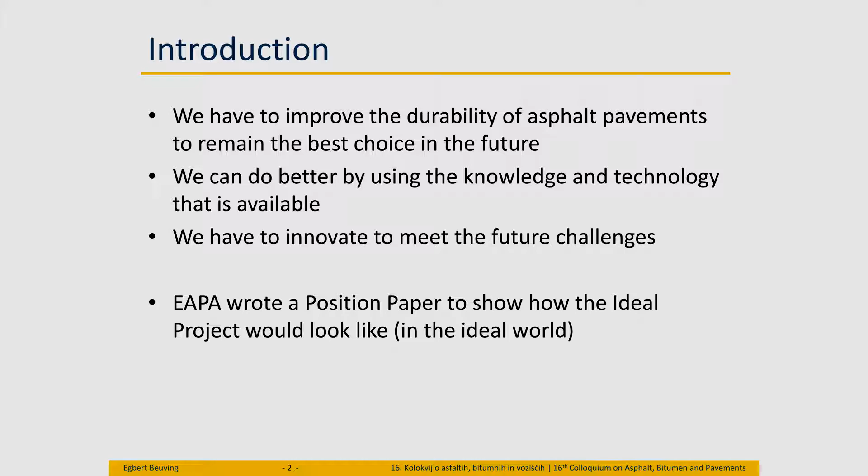In our asphalt industry, I think we have to improve the durability of our asphalt pavements to remain the best choice in the future. We can do better than we are doing now by using the knowledge and the technologies that are available. So in fact, we can do a better job than we are doing now. And we also have to innovate to meet the future challenges.

Ronald Blab already gave an example of using new technology, and you can see that when you use polymers, you increase the initial price, but in the end you have a good investment, a return on your investment. So it's a very useful tool to use.

To show you all the possibilities we have to create a better pavement, we created a paper called the Ideal Project, which shows the situation how it would be in an ideal situation. What I'm going to tell you is quite normal, not very special, but the technology that is available every day for you.

The goal of the paper is to improve the durability of the asphalt pavement. We have to improve the durability because it's important, first of all, to have a better availability of the road network.

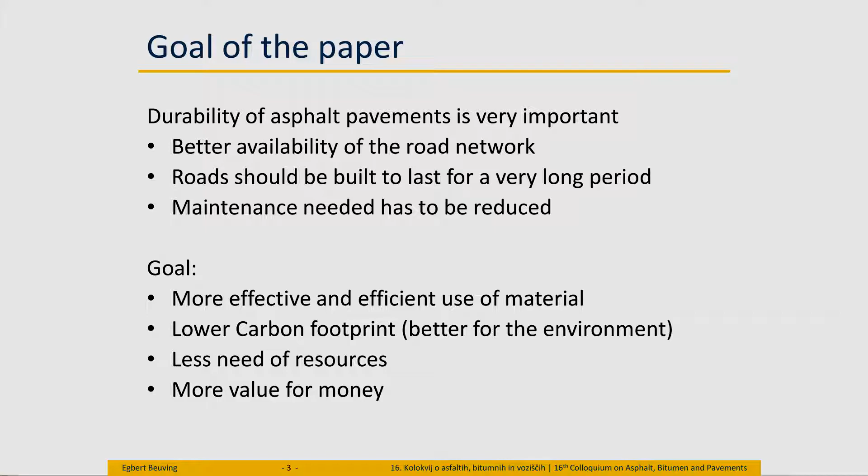We build roads to last for a long period, and we have to build them in such a way that the maintenance needed is as low as possible. Everybody agrees with that, I guess.

Next to that, by using materials in an effective and efficient way, we get a lower carbon footprint, which is very important to meet future environmental requirements. When you use your material efficiently, you also need fewer resources.

And last but not least, when you build roads in a very durable way, the road authority gets more value for the money it spends.

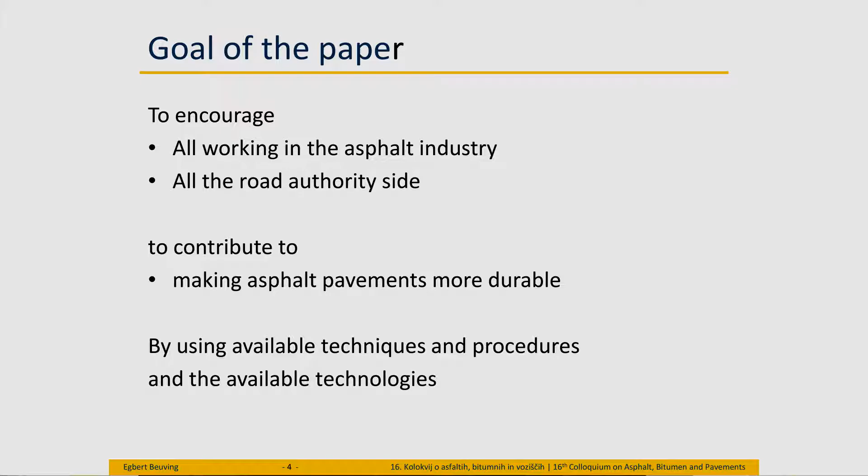The goal of the paper is to encourage everyone working in the asphalt industry and at the road authority side to contribute to making asphalt pavements more durable. So it's not only a message for the asphalt industry itself, but especially a message for the road authority to do things in a better way.

The main reason is also to be able to use the techniques and procedures that are available to make our roads better.

When you look at the paper, which is available on the EAPA website, you will find tools to increase the durability of asphalt pavements. We do that by providing good examples in all stages of the project, from the beginning until the end, or from the preparation stage until the maintenance stage.

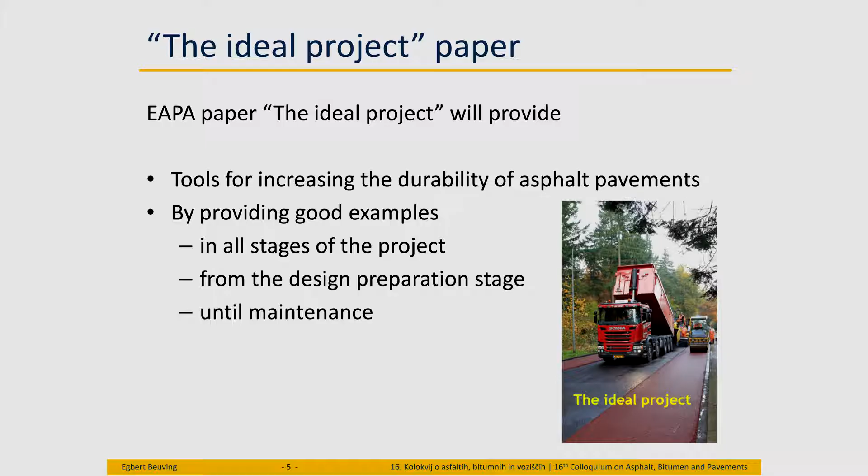So when you start, you can start, for instance, with the tendering procedure. At this moment, in most cases, the lowest bid is taken by the road authority, which means it results in the lowest possible or allowable quality. So you get as little as possible.

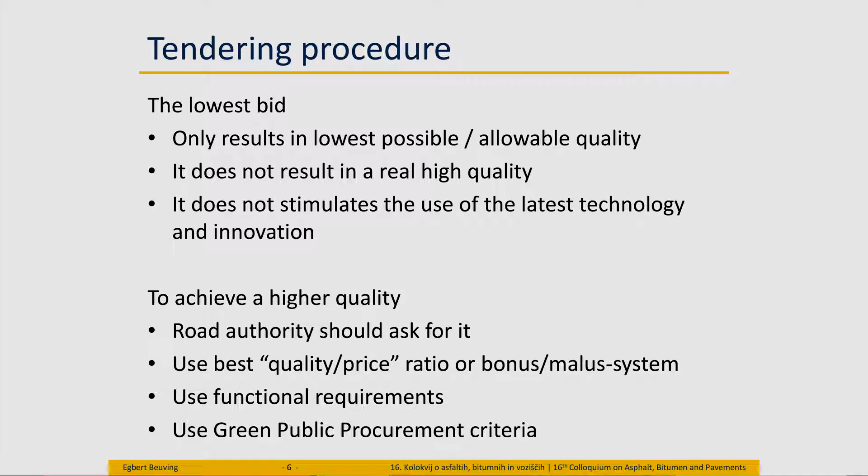And it surely does not result in high quality, and it doesn't stimulate the use of the latest technology or innovation. When you do it as simple as possible, you can have the lowest price. I always say that if Slovenko and I bid for a project, and Slovenko is even cheaper than I am, then he should have cut more corners than I did, because I already cut a lot of corners.

And that means everybody knows that when you have a very low price for a tender, you have a lot of problems on the job, and no need to talk about the quality in the end.

So to achieve better quality, the road authorities should ask for better quality, and they have a lot of possibilities to ask for more. They could use, for instance, the price-quality ratio, or give a bonus in situations when they get very good quality.

Another possibility is to use functional requirements. My colleague from the Netherlands will talk about that at a later stage - he says you should give the contractor an incentive to do his best. And there's also the possibility to use green public procurement criteria to get the product you're looking for.

Another example is project planning. When you put out tenders, you should do that in an early stage, because then the contractors have the possibility to prepare themselves. You should also see to it that you can do the paving operations in reasonable or good weather conditions. Everybody knows that in many countries, at the end of the year, they have to spend the money, and then you are paving surface layers at Christmas. Everybody knows that's stupid.

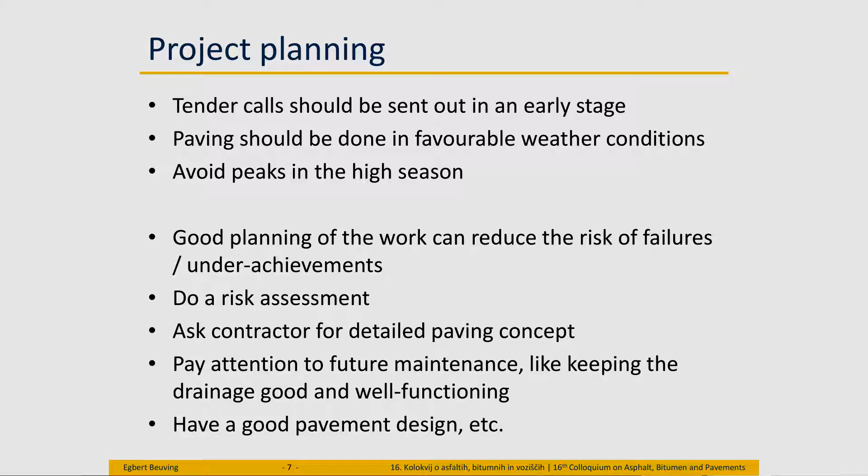Another thing is try to avoid the peaks in high season. It's good for quality to have an even distribution of the works, and by good planning you can do that. At the contractor side, certain things could also be done. As an example, a contractor can do a risk assessment to see where he should really be paying attention to the details. There are many other things you could look at in the planning.

The next example is the asphalt production. When you produce asphalt, it's important to see to it that you have a homogeneous product. I'm coming back to that several times. The main goal is to have a homogeneous product, because when you have a homogeneous product, you can extend the pavement life.

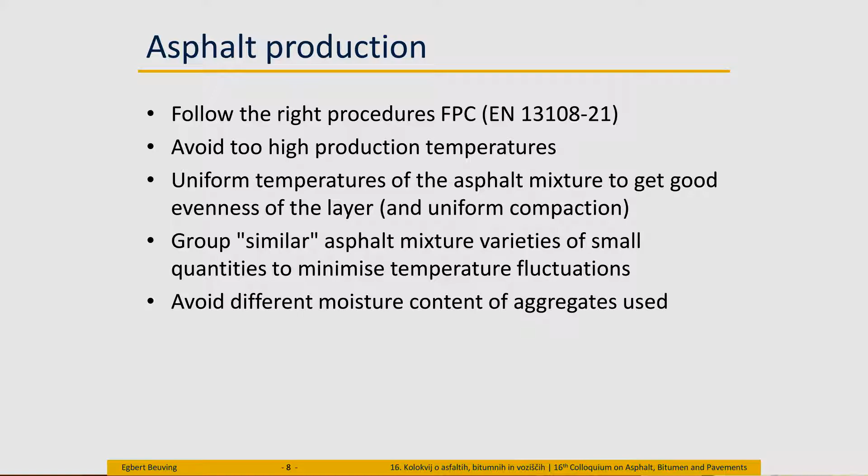So to get uniformity, you should try, if possible, to produce asphalt mixes with the same temperature and the same time period. You can group similar mixes to make the fluctuations less. Another example is try to avoid different moisture contents in your aggregate, because when you have a constant moisture content, there's also no need to have fluctuations in the burner to dry the aggregate.

The next step is the asphalt transport. For asphalt transport, you should avoid several things. You should avoid temperature differences due to cooling, and you should avoid segregation, for instance during loading. To be sure that you have a uniform mixture in the paver, you can use a material transfer vehicle or a shuttle buggy. You have to take care when you unload your truck, and all those things will help you to get a good quality in the end.

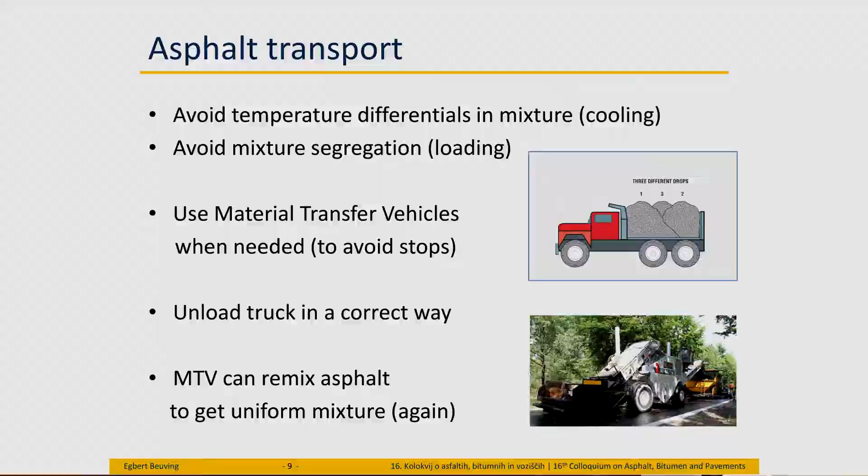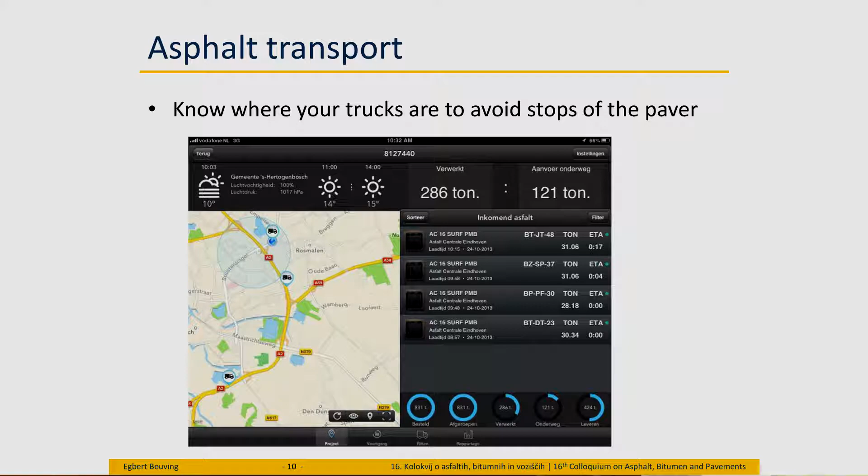We also have a lot of technology available to see where your trucks are. On the screen you see an example of KWS in the Netherlands. They use this software because they say asphalt is our black gold, it's very costly, so we have to know where each truck is. With this software you can see where each truck is, what it's loading or transporting, you see the license plate, and the estimated time of arrival.

At every moment you know where your trucks are. That means that when you are paving and you see that the amount of asphalt is reducing in the hopper, you can watch on your iPad or mobile phone and see when the next truck will be there.

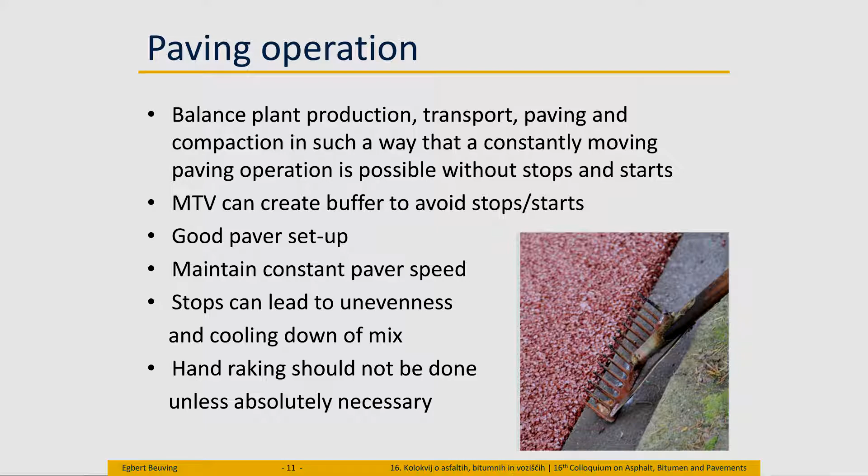During the paving operation itself, it's important that you balance the production, the transport, the paving and the compaction in such a way that you have a constantly moving paving operation. The constant speed is very important for several reasons. First of all, it's important again for having a homogeneous pavement. When you have a constant speed, you have a homogeneous surface, a smooth surface, and you can compact it in a good way.

As I said before, if you need it, you can use a material transfer vehicle to see to it that you have a constant amount of asphalt as a buffer.

Last but not least, when you are outside, you often see that the people using the rake do stupid things. Maybe you didn't pay attention to it, but I would say have a look at what they do, and in general you could say the less they do, the better it is, because they often disturb the good surface.

You also have the possibility to scan the temperature behind the screed by using an infrared scanner. And you also have a weather station that can inform the roller driver about the cooling speed of the asphalt layer.

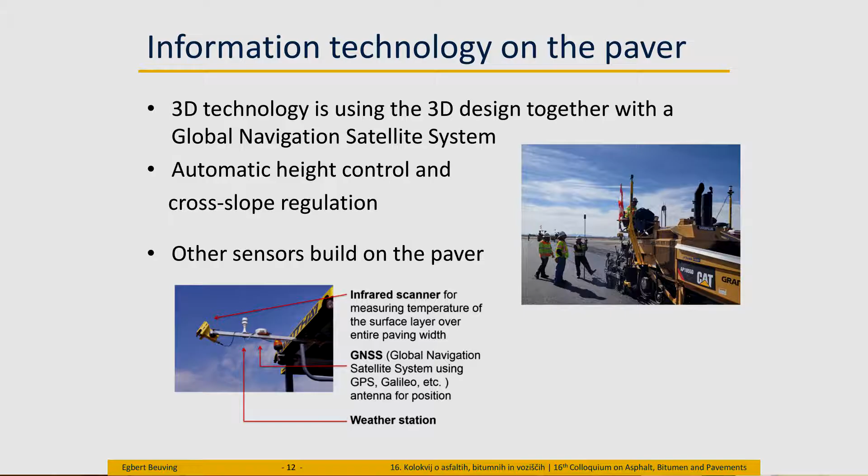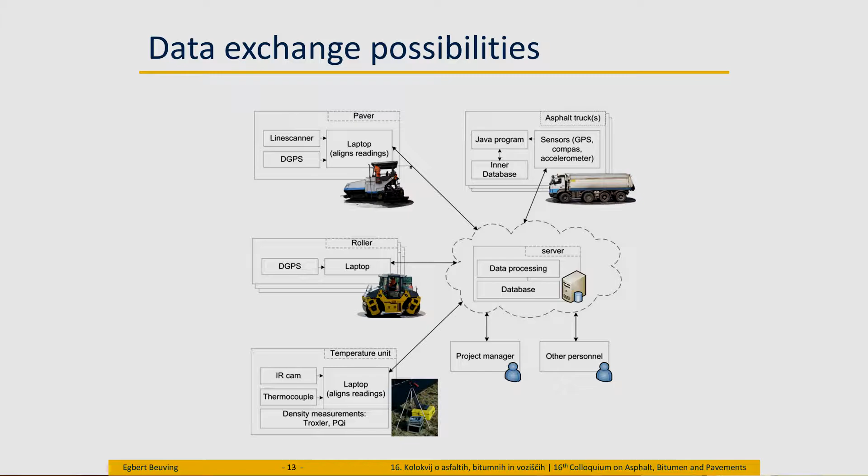When you look at the possibilities we have available nowadays, all the machines can communicate with each other. That means when you take the central database, you know where your trucks are, you know where your paver is, you know where your rollers are, and those machines can now inform each other. The roller can get information from the paver about the temperature of the asphalt behind the screed.

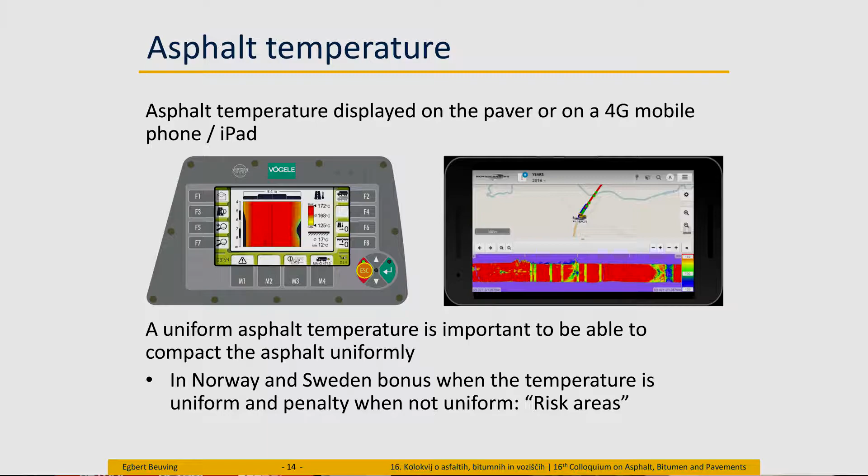The asphalt temperature behind the screed is very important. It's first of all important to have a very homogeneous pavement, because if you have an inhomogeneous temperature behind the screed, you will have a non-uniform compaction. That means the cool spots or cold spots will be compacted less than others, and after several years those cold spots will become potholes because they are badly compacted.

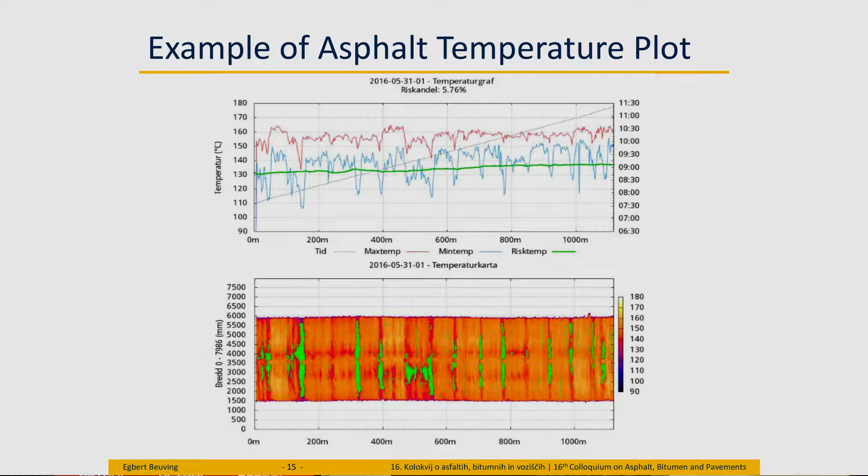As I said, you can measure the temperature behind the screed by using an infrared line scanner. In Norway and Sweden, they use this technique and have a system with bonuses and penalties based on what they call risk areas.

Over here you see an example of what an asphalt manager can see on his mobile phone.

You'd better hurry up because we're again in delay. Okay, thank you.

So over here you can see what the temperature is behind the screed.

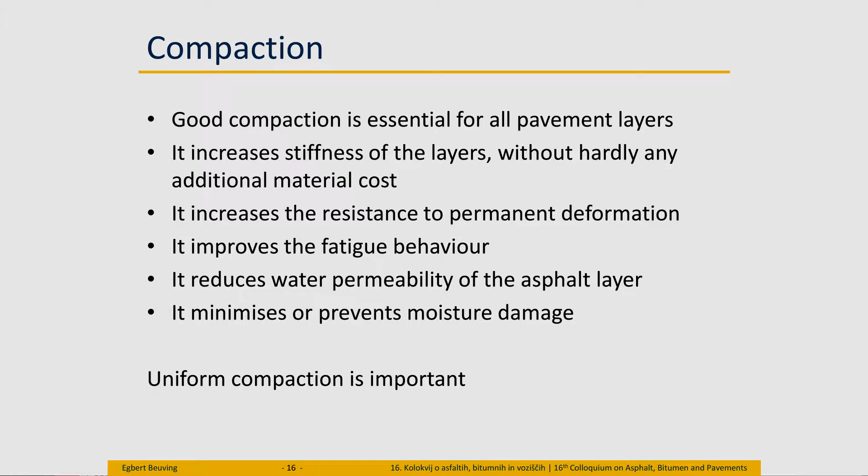Then compaction is important to have in a homogeneous way. Compaction is really essential to have good resistance against permanent deformation, to have good fatigue behavior, to reduce water permeability and to reduce moisture damage.

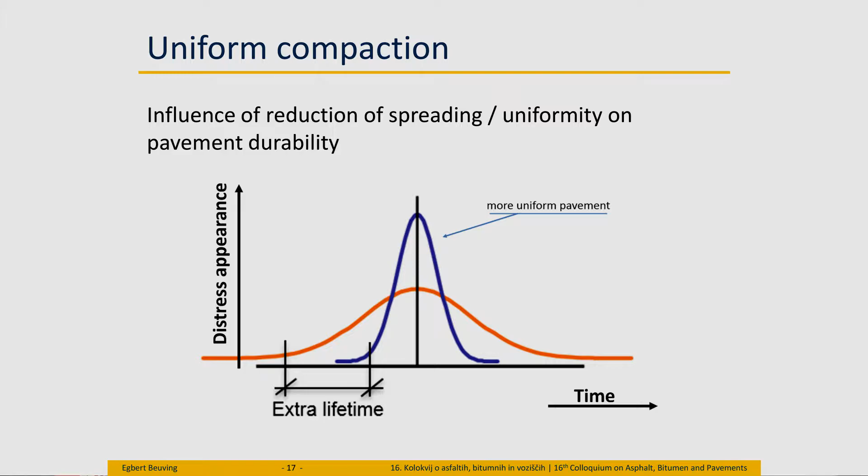Here you see what I mentioned before: when you have a uniform pavement, you get extra lifetime. If you have a non-uniform one, you will have failures at an early stage, and when you have a very uniform pavement, you will have extra lifetime.

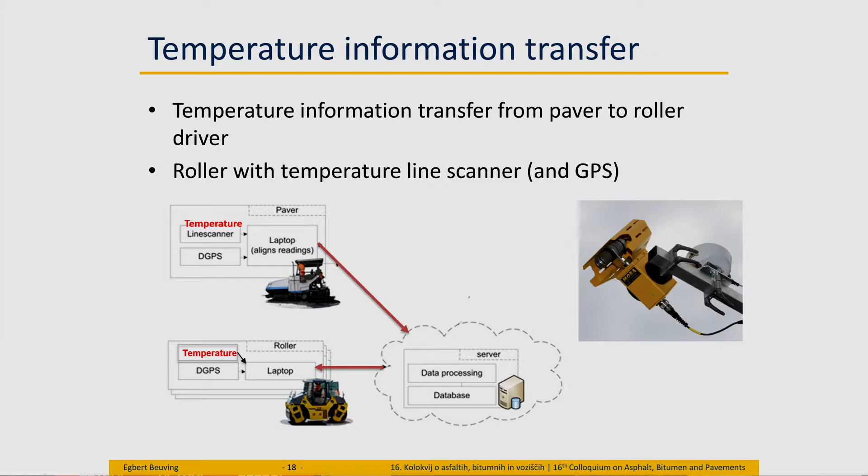Here you see as an example the infrared scanner, and here you see the information technology available on the roller. We have a lot of technologies that can be used by the roller driver, and with normal technology available, you can see how often you have compacted it, and you can even see the compaction level on maps.

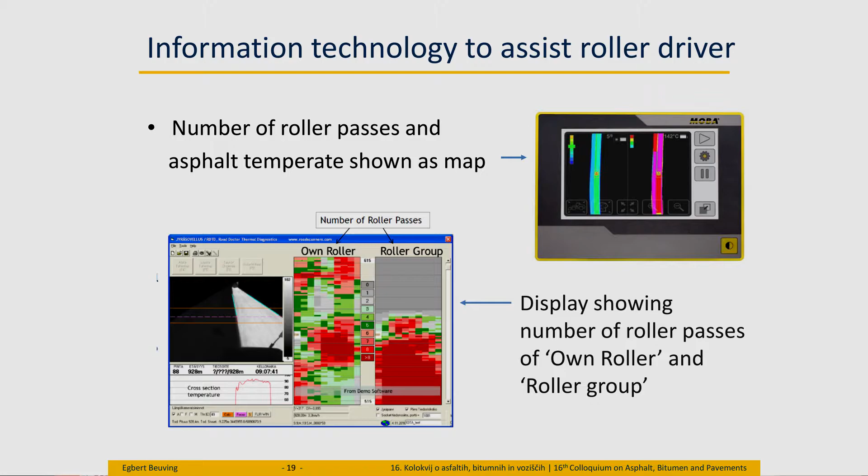I only mentioned a few things, but of course there are more things that influence the durability of the pavement, such as joints, edges, bond coats, etc. There are many things, and they are all covered in the EAPA paper.

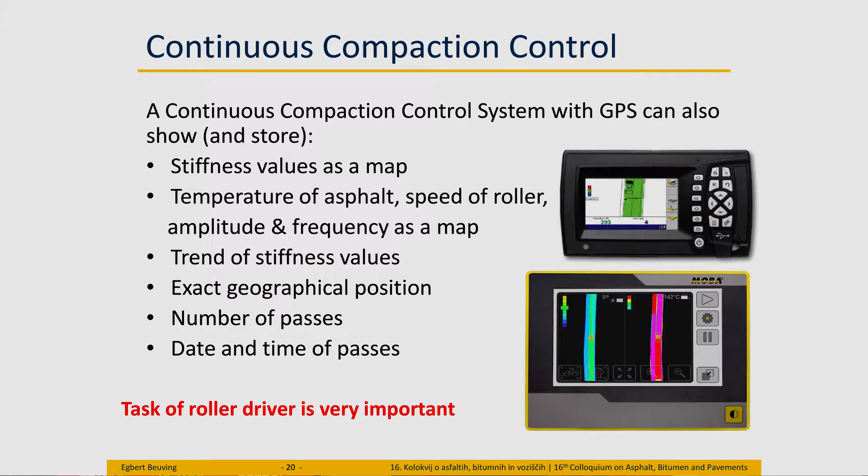In the end, you can also use all the data you collected to analyze the whole project, because what we should do at the end of the project is evaluate it to see where we can optimize it.

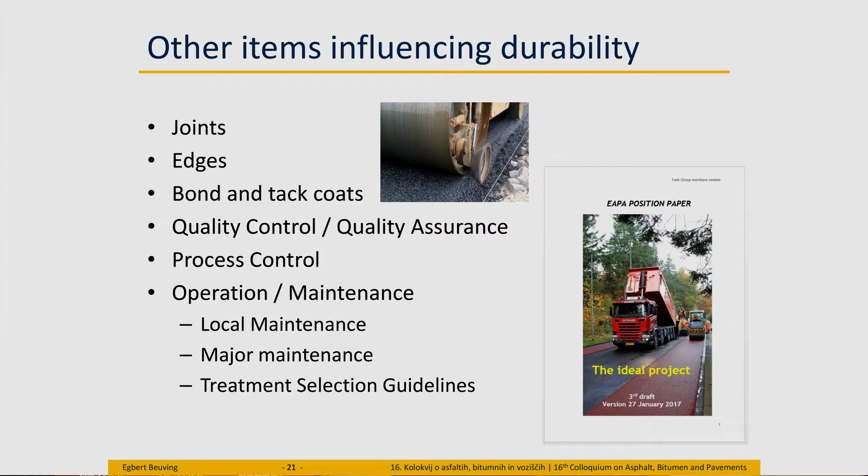So in short, with the tools and knowledge we have available, we can deliver a high quality product and a high quality road infrastructure to reduce maintenance activities.

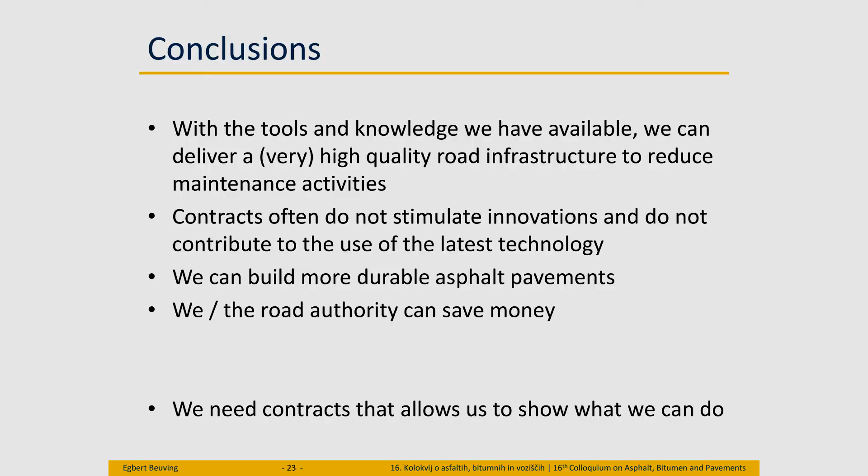However, the contracts we have nowadays often do not stimulate innovation and do not encourage us to use the latest technology available. In short, we can build pavements much more durable, and that will mean the road authority, and we as taxpayers, can save a lot of money.